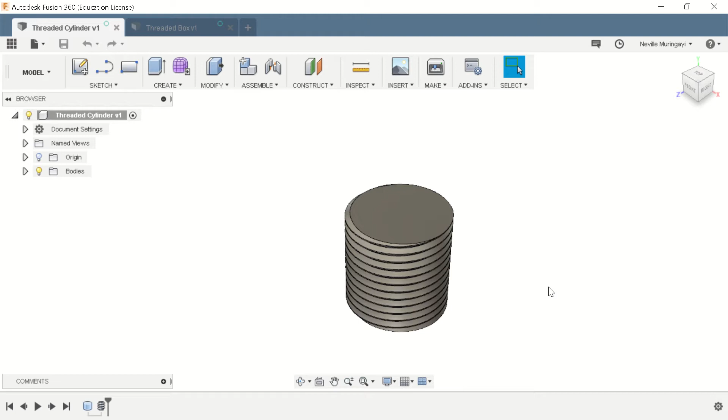So now let's say you want to 3D print a threaded cylinder for a project of some sort. You want to screw something in and you want to know how can I thread a cylinder. It's actually a very simple feature in Fusion 360. As you can see here, I've already threaded this cylinder. And your 3D printer will certainly be capable of printing these threads. You shouldn't have to worry about that.

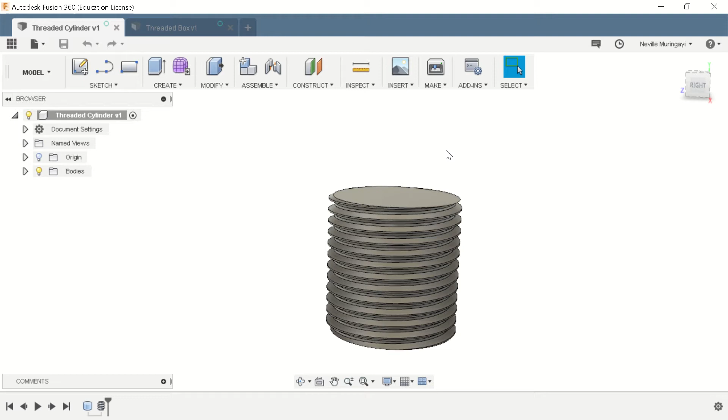You might have to play around a little bit with tolerances in terms of plastic shrinkage, but I've already created a PDF for that in the 3D printing optimization section, outlining the different tolerances for your plastic part, depending on the size you're printing, as well as how to design for materials in terms of whether you're using ABS plastic or PLA to see how much it'll shrink and how much you have to account for when you're designing it in Fusion 360. So let's go ahead and start a new design.

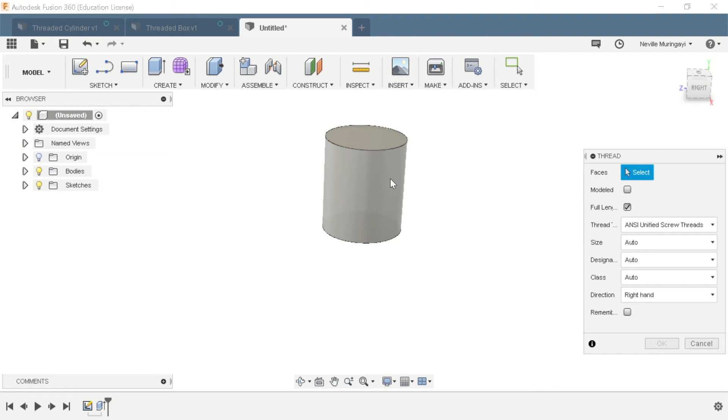And let's go ahead and create our cylinder. Start the circle. I'm going to click Stop Sketch and go ahead and extrude it. All right, cool. So now we have our cylinder and we want to thread it. So basically, in order to thread something, you go into Create and click Thread. And you click the face you want to thread. So we want to thread this cylindrical face right here. So I'm going to go ahead and click that.

I'm going to make sure that I check this modeled box right here. Otherwise, it'll look really weird. It's almost like this thread is inside another. It's within the face of the cylinder essentially. Like it doesn't really show that it's threaded. But we want to make sure that's modeled so we can see what it looks like.

And of course, you can change the size here. There are preset sizes. You can change the type of thread depending on what you need. Let's say you need a specific one, and you can also change the direction from right hand to left hand and the class and all that, and click OK.

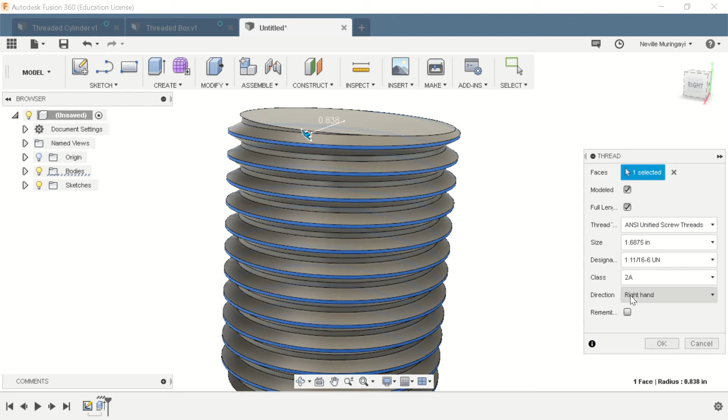And let's say you want to account for tolerances for threads. Like I said, you just have to basically account for the material using PLA or ABS, as well as the size of the thread and everything like that. But again, all of that is outlined in the PDFs in the 3D printing optimization section.

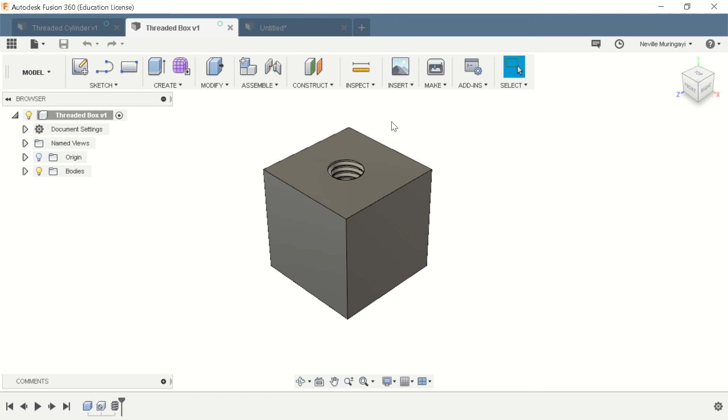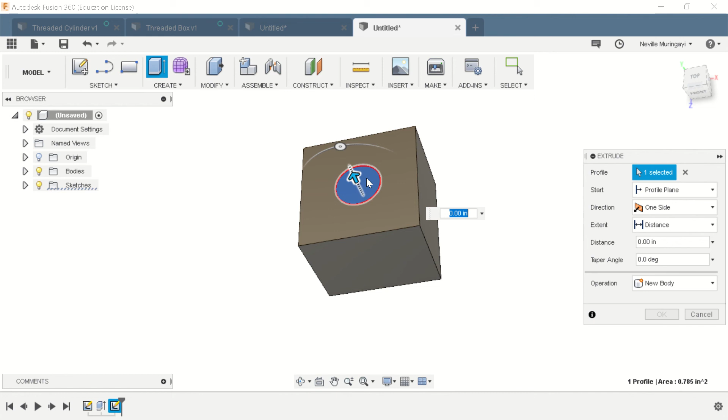So let's say you want to thread a hole now, and you don't want to thread a cylinder, like the hole in this box. It'd be very simple to do. So let's go ahead and start a new design and start making a box. Okay, and I'm going to make a hole for that box. Okay, cool. So now I have my hole in the box and I want to thread it.

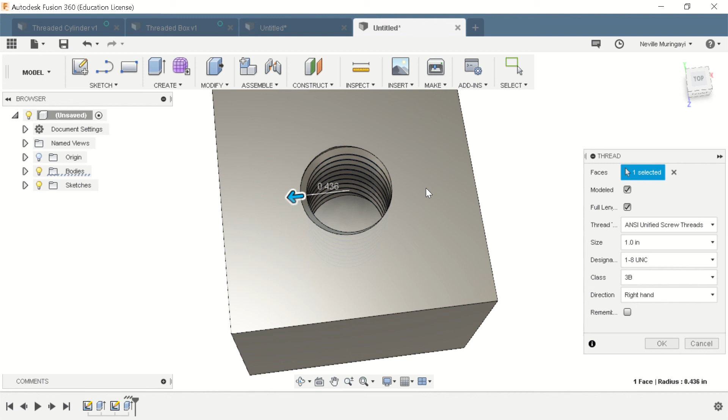So it's pretty much the same process. You go into the Create menu and you click Thread, and basically you just click the inside face now of this cylinder of the hole. And again, you want to make sure that the modeled box is checked off. And you maybe want to change the thread and the size and the design. You go ahead and do that here, change the direction, and now you have a threaded hole in the box.